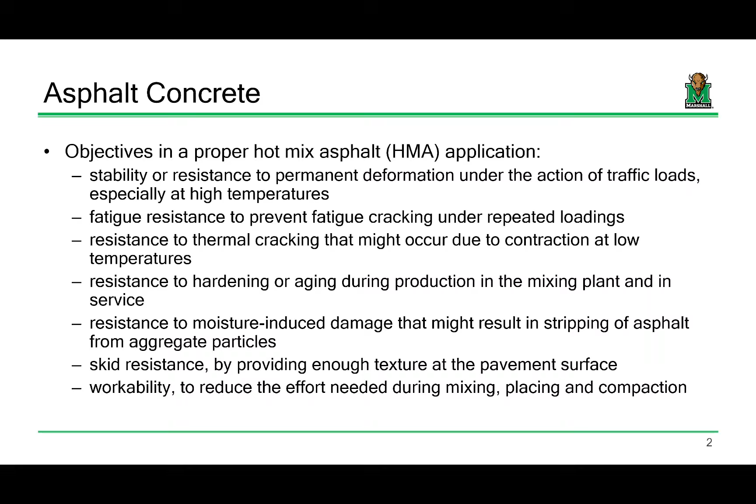Ultimately, when you do a mix design for asphalt, you've got an aggregate—usually not just one aggregate, but a mixture of several to get the proper blend. The purpose is to determine the amount of asphalt that goes into that mix.

It's a little tricky, because if you get too much asphalt binder, you get less stability, since the binding agent can act like a lubricant as you're placing it—almost too slippery. But if you have too little, it's not as durable. So there's a nice little sweet spot.

Typically, your asphalt content in a given concrete is going to be somewhere between 4% and 7%. That's a pretty good set-your-watch-by range. And you'll be placing it at high temperatures, somewhere between 185 and 325 degrees Fahrenheit. Has anybody been on a DOH job where they're placing asphalt? It's pretty hot, isn't it? Yeah, that's what you're doing.

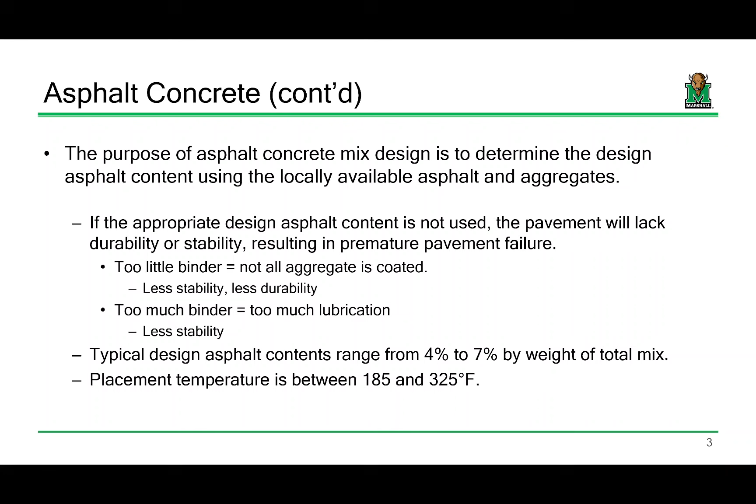Now I'll mention this now since it's a good place for it, and I'll talk about it throughout the lecture. The two ingredients we're essentially proportioning together when we generate an asphalt pavement are asphalt and aggregate. But there is a third ingredient inside the mix, and that third ingredient is air.

A lot of the properties we'll be computing today, whenever you go through a mix design—whether it's the Marshall method or the Superpave method—are very rote, tabular, step-by-step, similar to what we've done all semester: computing specific gravities, weights and volumes, and so on. But there are some ratios that take a bit more time, like the percent air voids in the mix, or the percent voids in the aggregate filled with asphalt. That takes some work to go through, but once you understand it, following the methods is really simple.

Now there are three methods that I just want to make sure you're aware of.

The most common method used today by most DOHs is called the superpave method. There are a couple historical methods I'll mention so you're aware of what's going on: the Marshall method and the Hveem method. We don't really use the Hveem method around here, and I'll talk about why in a bit. The Marshall method is a little more empirical and simpler, but because it's empirical, there's more variance in performance. Superpave is much more rigorous and performance-based.

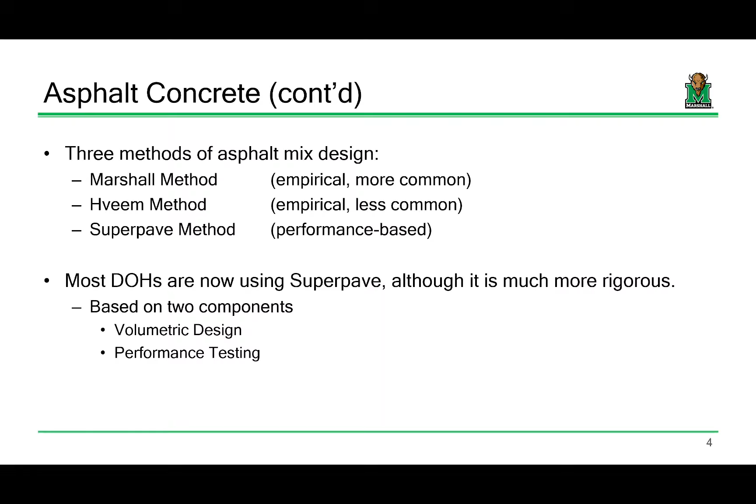One thing about asphalt design methods in general: whenever you review them, like in the case of superpave, you go through selecting the aggregate, selecting the binder, determining the aggregate structure and binder structure. A lot of this requires lab testing. One disadvantage of the superpave method is that you have to do much more extensive lab tests to characterize your aggregate, asphalt, and mixtures appropriately, which can be a money sink in whatever lab setting is doing that.

Do you get better data and a more reliable design? Well, yes. All of these mix design methods ultimately rely on some sort of testing, and that's not really anything hyper unique to asphalt.

Think about the mix design we did for concrete. We went through this big volumetric design process, about 11 steps to get to the answer, but that was just the first part. The second part was to go to the lab, test those cylinders, and adjust your mix accordingly, iterating as needed. It's the same idea here.

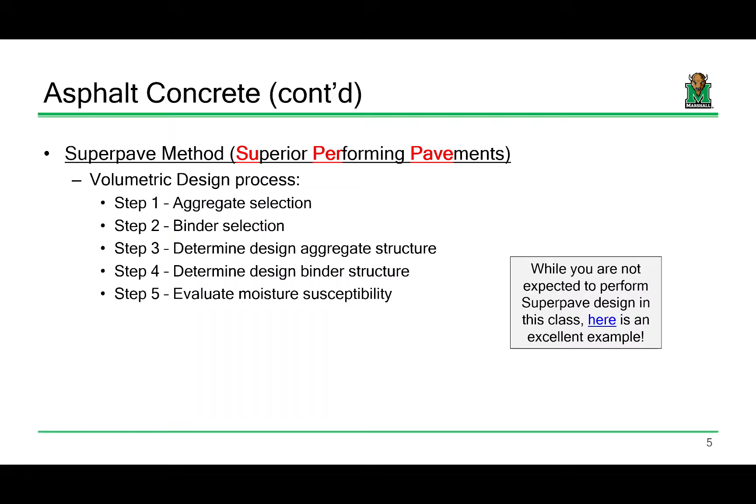Now, one thing I'll mention—I linked this. It's from Rowan University, a really good PowerPoint that goes step by step through how to do superpave if you're interested. It's pretty easy to follow and it all works very well. What I'm going to try to do today is fill in the gaps on some of that stuff.

The Marshall method is a simpler approach, but it also requires lab tests and whatnot. The thing about asphalt design methods in general, and the Marshall method is a good way of illustrating this, is that these methods are very repetitive. You end up having to do the same computations over and over again, so they're very spreadsheet friendly.

So what happens is, in the case of the Marshall design method, you've got to do all of your aggregate evaluations—things like specific gravity, angularity, all of that. You do the same characteristic assessment of your asphalt binders. Then you need to perform a void analysis, which is what we're going to be doing today. Once you do that, ultimately it's a lot of repetitive calculations.

You generate a series of graphs by assuming an asphalt content of, say, 3.5%, computing a bunch of void ratios—the VFA, the VMA, the air voids, etc. Then you do it again for 4%, 4.5%, 5%, and so on. So it's very spreadsheetable, if that makes any sense.

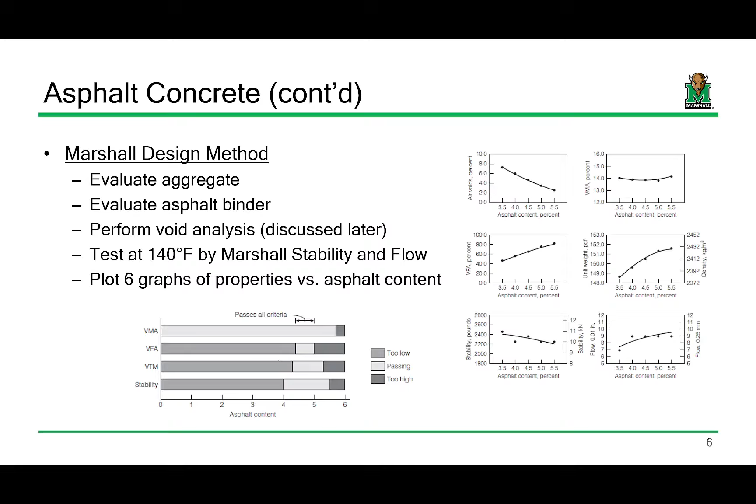You get a series of curves for each of these different ratios, and ultimately, talking about voids filled with asphalt, depending on the asphalt content you choose, there's a range that's too low, a range that's too high, and a range that works. For each of these ratios under a given mix design method, you try to find the range where they all work, and that range satisfies all of your criteria—so you pick your asphalt content there. Once you understand how to compute these, it's a pretty straightforward process.

I mentioned the Hveem method just to be comprehensive, but we didn't really use it. The Hveem method is very empirical, and the only place you really see it used is in the western part of the United States. It's a lot simpler, but there's a little less correction for aggregate properties and things like that—the method assumes some base behavior that you'd get if doing the mix design in a given location.

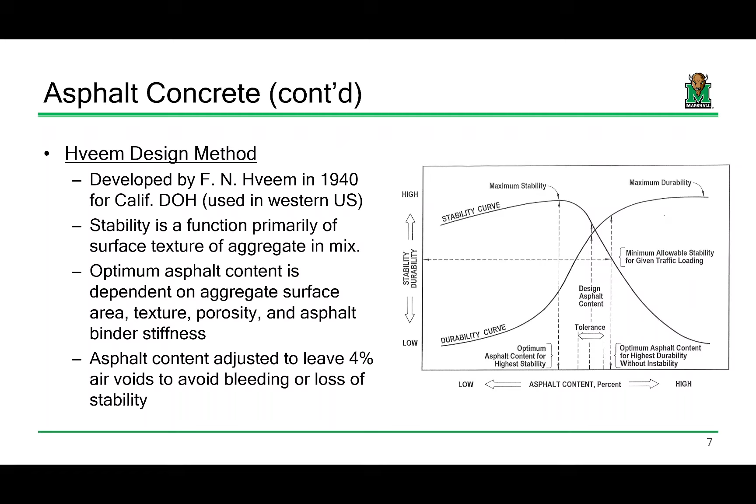So that's why, I'm not saying there's anything wrong with it, I'm just saying that sometimes in engineering you will find methods that work very well within their chosen constraints. And when you take those methods and start applying them out of that context, that's when you start getting some problems.

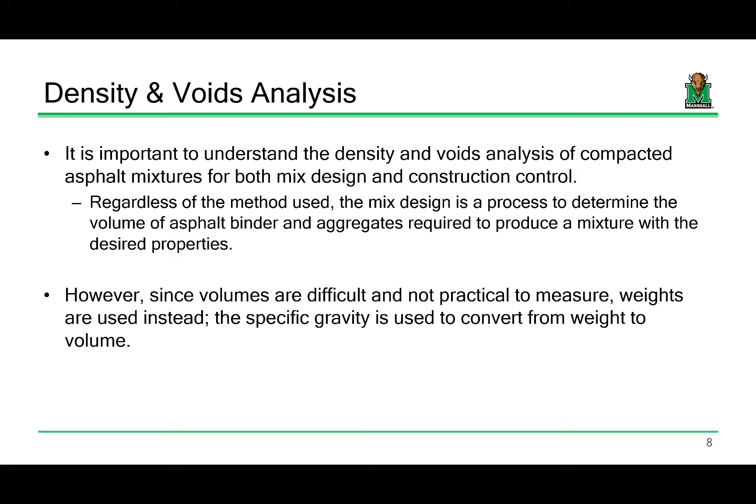Volumes are really difficult to measure, okay? Weights are a lot easier to measure. So what we're going to do, since we know how to characterize each individual component, is define these volumetric void ratios rigorously as volume ratios. But since volumes are difficult to measure, we're going to convert them to computations using specific gravities. There's a little bit of magic I'm doing in the background for that, but you'll get what I'm talking about in a bit.

For those of you that have not had geotech, I'm going to draw a soil phase diagram over here on the board and relate it to this. So if you're looking at a sample of soil, let's say I dig up some soil from the earth and ask, what are its constitutive components? Well, in the case of soil, it's composed of 3 individual constitutive components at different percentages: air, water, and solids.

And then for a given soil sample, a very common exercise in geotech is: if I give you certain data points, can you compute everything else? So the way I always did it is, over here on the left, I would characterize weights, and over here on the right, I would characterize volumes. Is that how you all did it? Yeah, does that look familiar? So it's almost like drawing dimensions. For the weights, we'll call this dimension the weight, sometimes called weight total. And the same thing over here, we'll have a volume total.

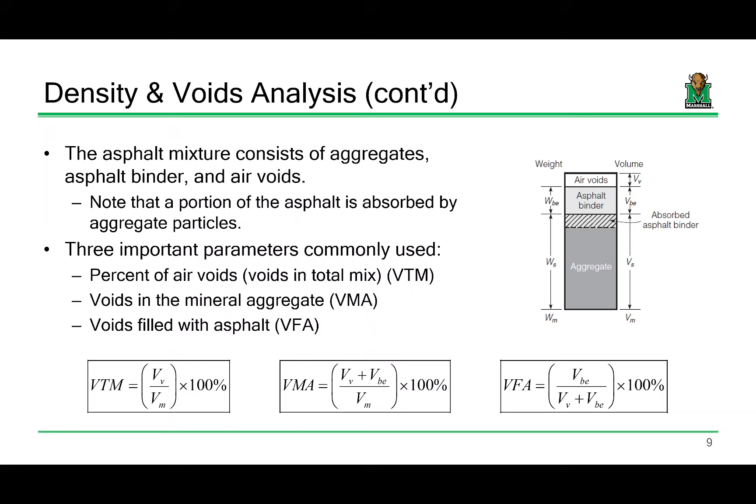The problem is that computing these volumes for an asphalt is very complicated because asphalt is compacted. So if I take a section of asphalt that has this volume, I can compact it, and it has a different volume. So computing these ratios in terms of volumes is a little tricky. Instead, what's a little bit more accurate is to express them in terms of weights, or maybe more indirectly, in terms of specific gravities.

I'm going to throw some terms at you. Some of these terms you've kind of seen, some of them you haven't. We're going to see these here in a bit. So the first thing I'm going to show you is this GMM.

GMM stands for, it's basically the maximum possible specific gravity of the asphalt concrete mixture. So when I say asphalt concrete, I mean binder, aggregate, all of that. GMM is the theoretical maximum specific gravity, sometimes called the Rice gravity. So if you ever hear the term Rice gravity, that means the theoretical maximum specific gravity -- in other words, what would happen if there was binding agent, aggregate, and no air. That is as heavy as it could get.

GSE, which we're actually not going to explicitly use here, but that's the specific gravity of the aggregate, and then GB, that's going to be the specific gravity of the binder.

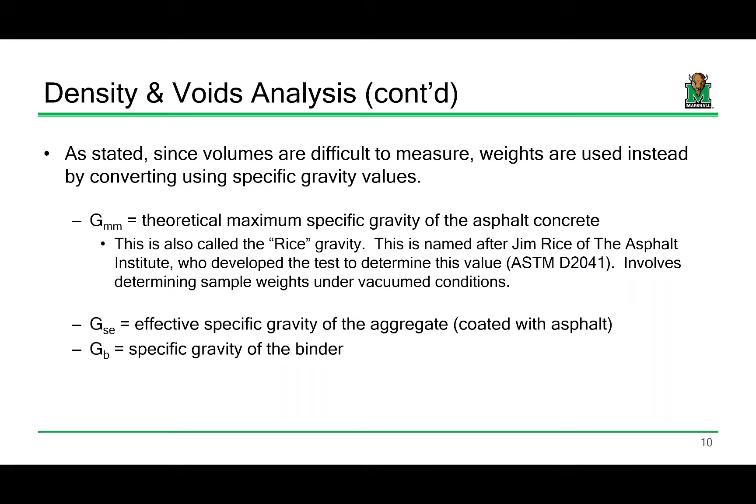Now, I'm bringing up some stuff here that we've seen a while back. Do you remember, this was way back in the semester, when we were talking about blending aggregates? Remember how we would say, here's gravel 1 and gravel 2, and neither gravel 1 nor gravel 2 meet the specifications for a given job. But if I put a little bit of gravel 1 and a little bit of gravel 2 all together, suddenly I've got an aggregate that works. Y'all remember that? And remember how all of the properties were computed as a weighted average, other than the specific gravity.

And remember how we compute the specific gravity -- we take 1 divided by the sum of the percentage of a given component divided by specific gravity. Y'all remember that? We're going to do that today. Now, I'm going to slightly adjust it a little bit.

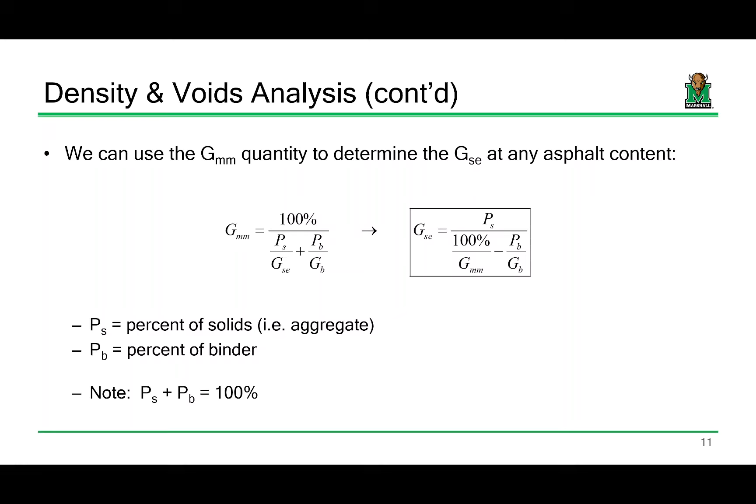I'm going to call this 100% because I'm going to express these as percentages. So the top's going to be multiplied by 100, the bottom's going to be multiplied by 100. We're going to see that here in a little bit.

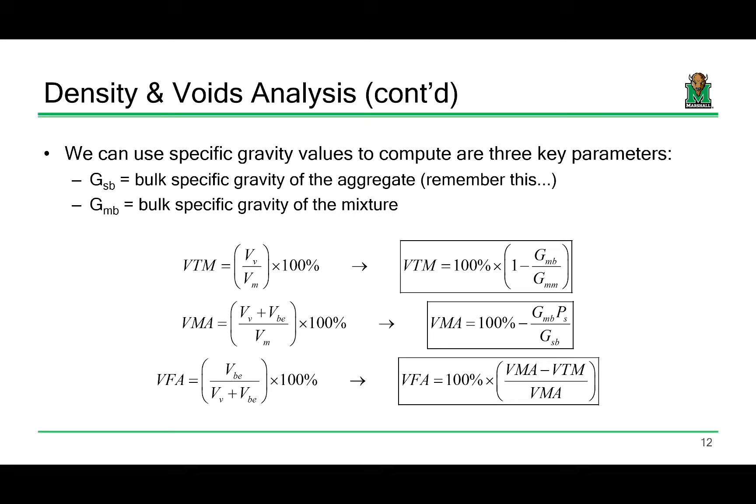For each of these ratios, instead of computing with volumes, I'm going to compute them with specific gravities. There's a couple terms we're going to go through together: the bulk specific gravity of the aggregate, the maximum theoretical or Rice specific gravity, and we're also going to need to calculate the bulk specific gravity of the mixture. It's not hard, but there's a little bit of bookkeeping involved.

So let's explain that bookkeeping with an example. I have a compacted specimen of hot mix asphalt. Let me set the stage on what's going on here. I prepared a mixture of hot mix asphalt with 4 aggregates and a binding agent: aggregate 1, aggregate 2, aggregate 3, aggregate 4.

If you notice here on the board, this is data that I was looking forward into the future, so I went ahead and wrote it here. The total weight, if I sum this up, is something like 5.51 pounds.

From this mixture of asphalt, I drew a sample of about half of it and compacted it into a test specimen. I drew from this sample a specimen that weighs 2.55 pounds and has a volume of 30.5 cubic inches. We're going to use that a little bit later.

What I want to determine, ultimately, is these volumetric ratios. But in order to determine these volumetric ratios, I'm going to need to determine these specific gravities. So let's go through this.

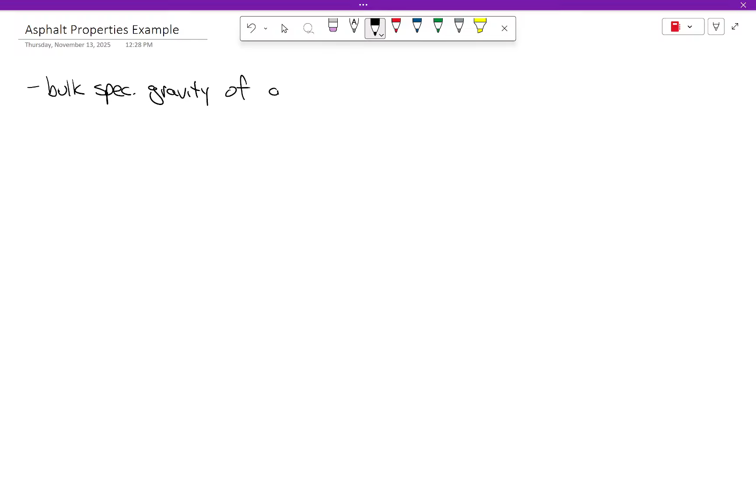There's several properties that we need to compute, so I'm going to take each property one step at a time. The first property that we're going to compute is the bulk specific gravity of the aggregate.

The symbol for that is GSB. This is before we're taking this aggregate mixture and putting it into the mix. We're just taking all these 4 aggregates and trying to treat them as one. So this value - we've got 4 aggregates, I just want to treat it as one aggregate. I need a specific gravity of the mix.

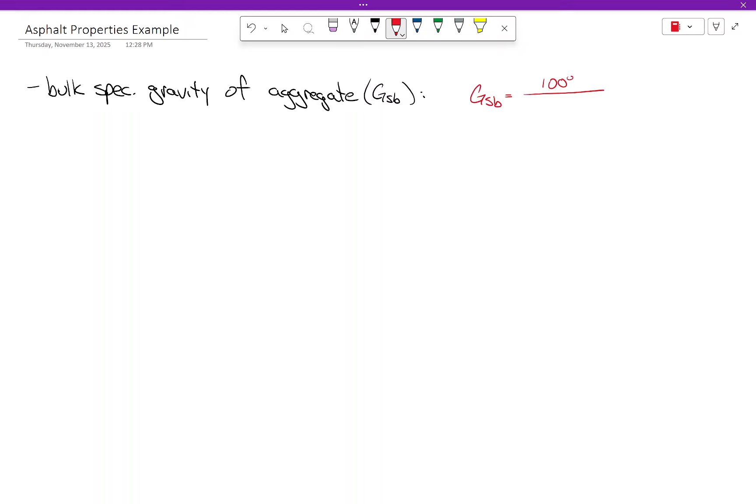And the way that we're going to compute that is a fraction. We're going to take 100% divided by the sum of Pi over Gi. This is going to be how we do that. So how do we go about that? We have our components.

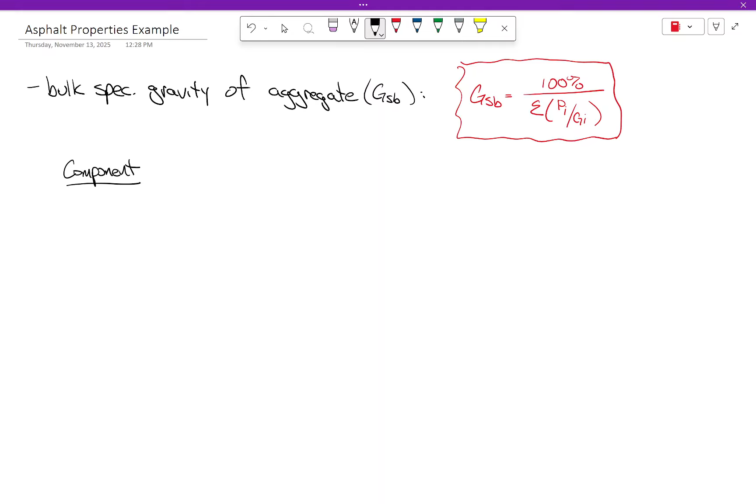Oh sorry, wait, I'm getting ahead of myself. I'm looking at the aggregate right now, so I'm actually just going to list the aggregates by themselves. I'm going to do the binder later.

So the weight of these is going to be 1.76, 2.43, 0.77, 0.33. I'm skipping the binder right now because I'm just trying to characterize the bulk specific gravity of the aggregate. If I sum these up, I get 5.29. That's different than the other total because that one includes the binding agent - I'm not looking at the binder right now.

Now the next thing I want to compute is a percentage. So let's pop quiz everybody: the total amount of aggregate in this mixture is 5.29 pounds, and aggregate 1 takes up 1.76 pounds. How much is the percentage? How would I calculate this - is it 20%? Is it 30%? How much is this part of the mix?

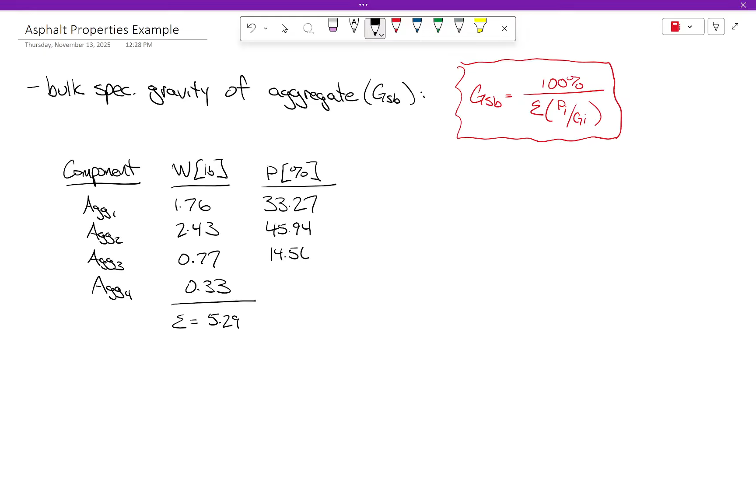33.27%, and you basically just took that and divided it by the sum. I'm multiplying it by 100 just to make the numbers a little bigger and easier to deal with. Is everybody okay with that? And if I kept going, this is going to be 45.94, 14.56, 6.24. Let's just have those there. If I sum those up, that should be 100. There we go.

So now I'm going to list the specific gravities. I've got something on my screen there.

So the specific gravities are 2.62, 2.51, 2.47, 2.42. Okay, so now that I've got that, what am I going to do with it?

Ultimately, I need to take 100 and divide it by this sum. That sum is going to be the sum of these fractions. So let's calculate that fraction for each row.

Let's take Pi divided by Gi. What am I doing? I'm taking this divided by that, this divided by that, this divided by that, this divided by that. So that's going to give me...

12.699. Is everybody okay with that? This is going to be 18.301. 5.893, 2.578.

Is that okay that I just did that, or y'all comfortable with that? It's just the percentage divided by the specific gravity. Yeah, just that, bam bam bam bam bam. This one's 6 and change divided by 2 and change is about 2 and change.

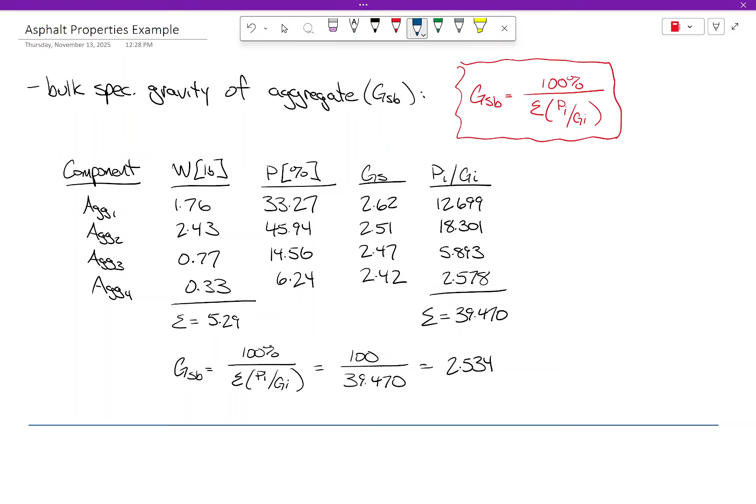So let's just put that on the board, just so we have it. Okay, all right. Is that easy? Everybody okay with that? All right, so that one's easy. Okay, what about the next one?

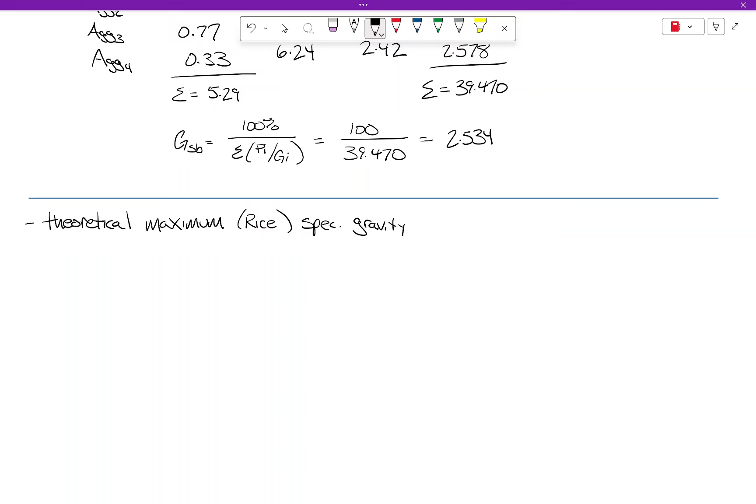So the next thing we're now going to compute is theoretical maximum, or the Rice specific gravity, okay?

Now this is going to feel really redundant, but that computation I just did, I'm going to do it again. What's going to change? Instead of looking at aggregate 1, 2, 3, and 4, now I'm going to look at aggregate 1, 2, 3, and 4 and the binding agent. So essentially I got to do this calculation all over again. Now you might think, what changes? Well, just bear with me.

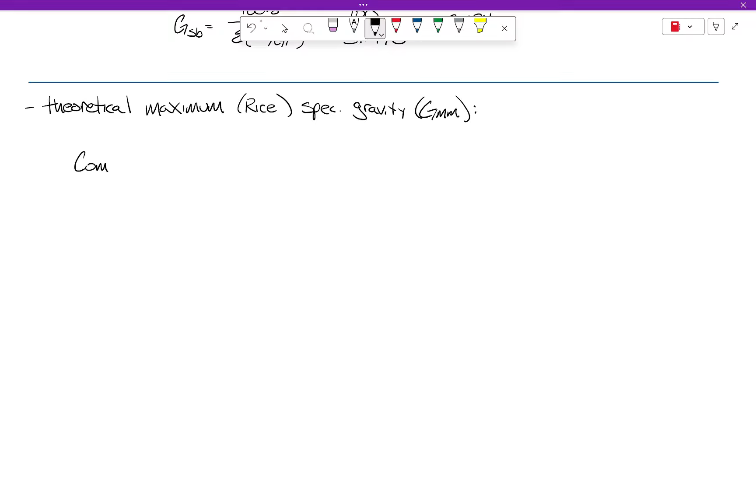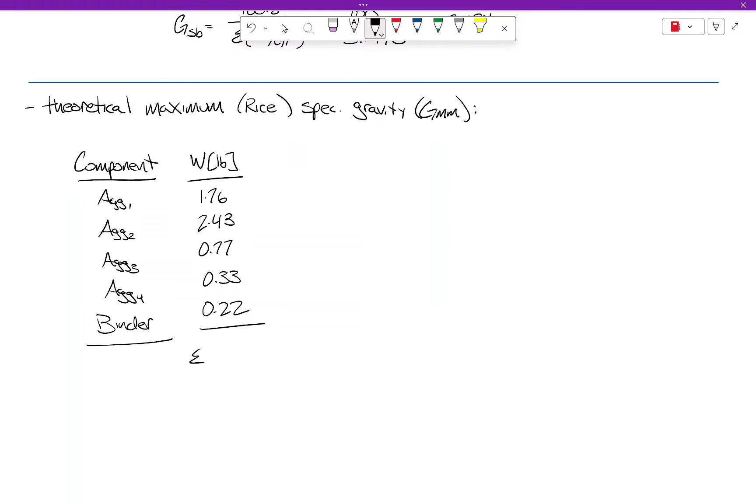Okay, so let's record our weights down. Now here's the thing: the sum at the bottom is now different. Before, the sum was 5.29. Now the sum is going to be 5.51.

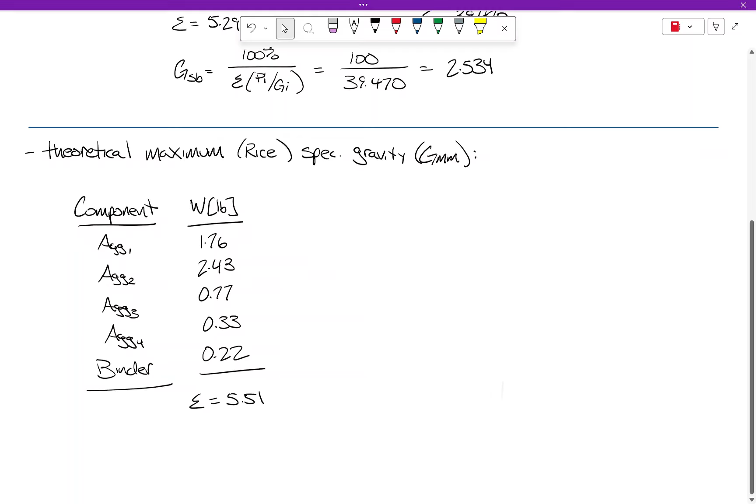So what I'm getting at is, because I now have a new ingredient, each one of these percentages are going to be ever so slightly different. And I've got another ingredient, so basically I have to do that specific gravity calculation all over again, just with a new ingredient.

Take 1.76 divided by 5.51. Take 2.43 divided by 5.51, etc. All right, and then we've got our specific gravity.

And so now I'm going to do the same calculation. Yeah, it's kind of a dry set of computations.

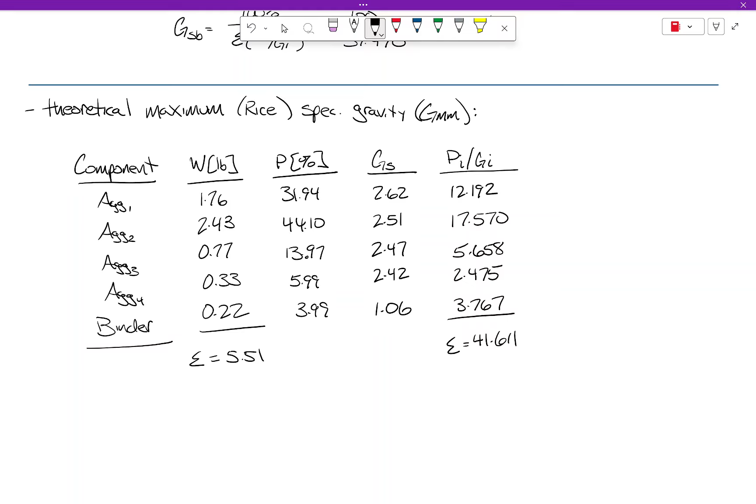Now, I'm going to leave a little bit of space right here for a reason. Just bear with me on that, okay? All right, so how do we calculate our GMM?

And it ends up being 2.400.

So let's just take a look at the data. This is the specific gravity of the aggregate. This is the maximum possible specific gravity of the asphalt concrete mixture. Now, why is it less? Well, it's because we added a binding agent that's not very heavy, so that's going to drop the overall specific gravity. But this specific gravity assumes no voids in the mixture.

And so when we calculate GMB, which is the specific gravity of the sample that we collected, it's going to be less than 2.400 because it's got air in it, okay? So you're going to see that here in a bit. But I'm not done with this. We're going to see a value pop up in a later calculation.

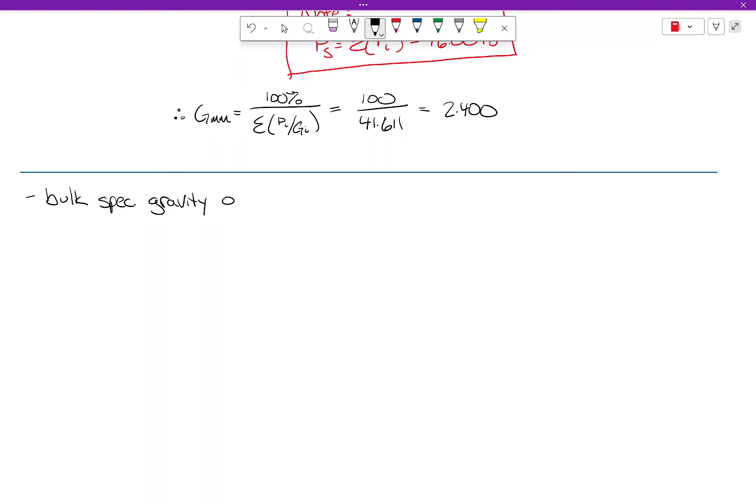Okay, next thing I'm going to compute is this.

Just to explain what we're doing here, remember ultimately all of these voids are trying to make sure we're fully characterizing the air in the mix. This GMM value is what the specific gravity of the asphalt mixture would be if there was no air in it. But we drew a sample, and that sample has air in it.

So how are we going to figure that out? Well, what do we know about the sample that we drew? We know the sample has a weight of 2.55 pounds, and we know the sample has a volume of 30.5 cubic inches. Now, how do we measure unit weights?

How have we been measuring unit weights? The unit weight of water is 62.4 what? I know you all have fluids, I hear about it all the time. Unit weight of water is 62.4 pounds per what? Come on, don't be shy. Cubic inch? Pounds per cubic inch? Cubic feet. Come on now.

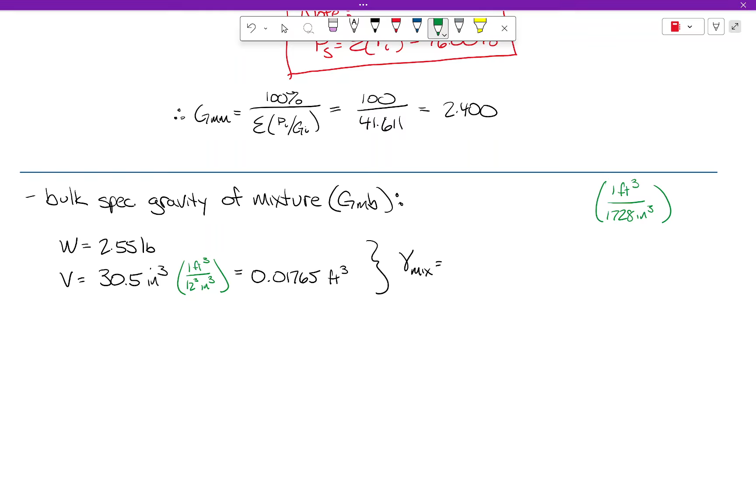Now, how do we compute unit weight? Weight over the volume. Weight over the volume. There we go.

You didn't really want me to bring up fluids again, did you? Come on now. Y'all are done with this semester, I can tell. Y'all are just done. We're almost there. Look at this, after today in this class we only have 3 more lectures, and one of them is just Q&A on the lab report. So we're almost there. Can you say that louder, Cole? I think he's expressing joy. This class is not the problem, is what he said.

The answer is 144.472, and the units are pounds per cubic feet.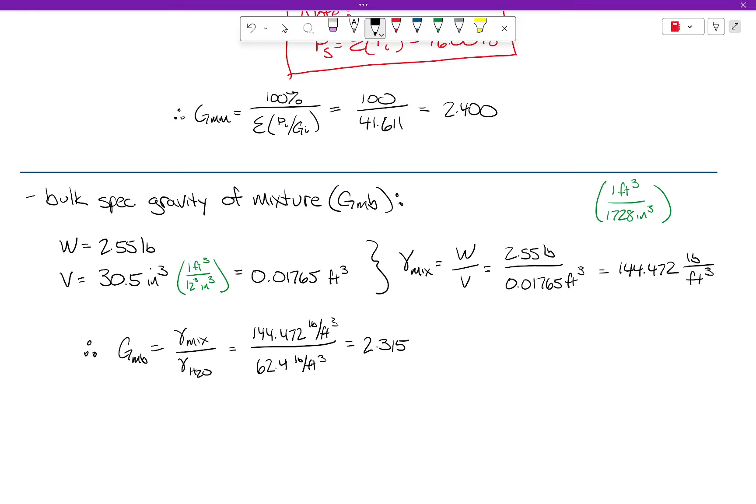So these are our three specific gravities, and we're going to use these specific gravities in order to compute our three ratios. Once you get these specific gravities, our three void ratios are pretty simple to compute. They're not hard, okay?

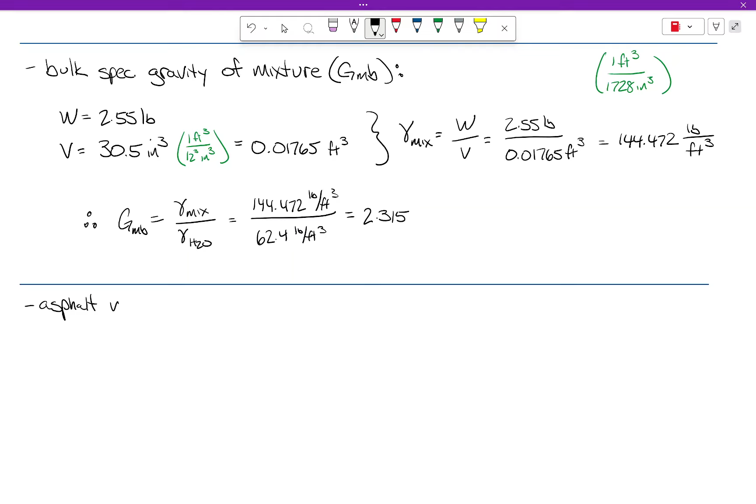Okay, everybody got this? Metric and US units, all right.

Okay, first thing we're going to compute is the percent air voids in the total mix, which is called the VTM.

And the VTM, so here, let's see if we can reason through what the formula looks like. Okay, so first off, I'm going to want this as a percentage, so I'm going to multiply it by 100% on the outside. So this is the specific gravity of the mixture, and this is the maximum possible specific gravity.

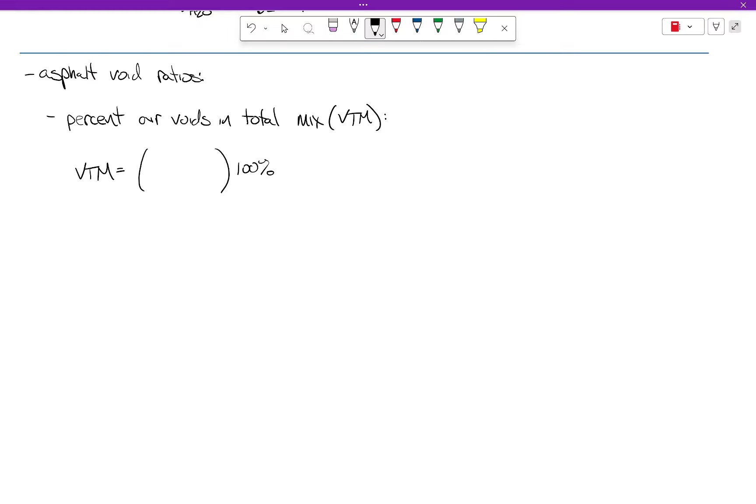So the difference between the two is the fact that there are voids in it, right? And we're talking about a percent change. So essentially what I'm doing is the change in specific gravity over the original. It's like a percent change in an experiment.

So one way that we could compute that is we could say GMM minus GMB over GMM, right? Theoretical minus expected, all over. But we can separate that as 1 minus GMB over GMM by just recognizing that GMM over GMM is 1.

And what is the formula? The formula is 1 minus GMB over GMM. That's it. So it's a pretty straightforward calculation.

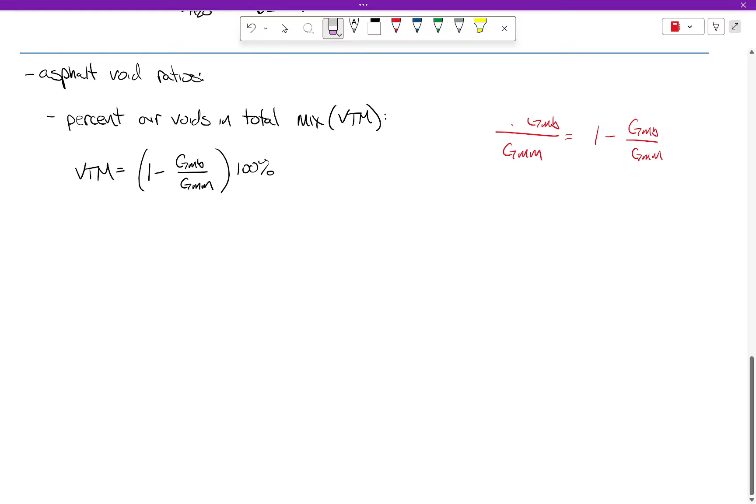And the way that we compute that is as follows. Okay, so when we chug that out, we get 3.54%.

So what that's saying is that 3.54% of the volume is air.

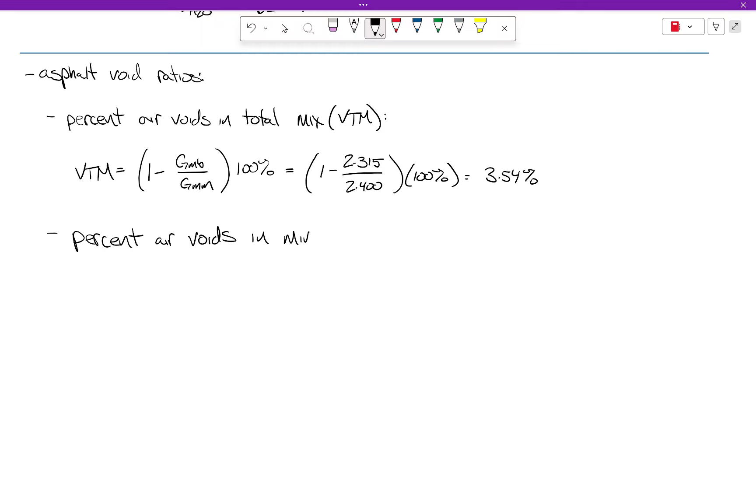All right, so for this next one, the next ones are percent air voids in mineral aggregate. Okay, I know, I'm a dork.

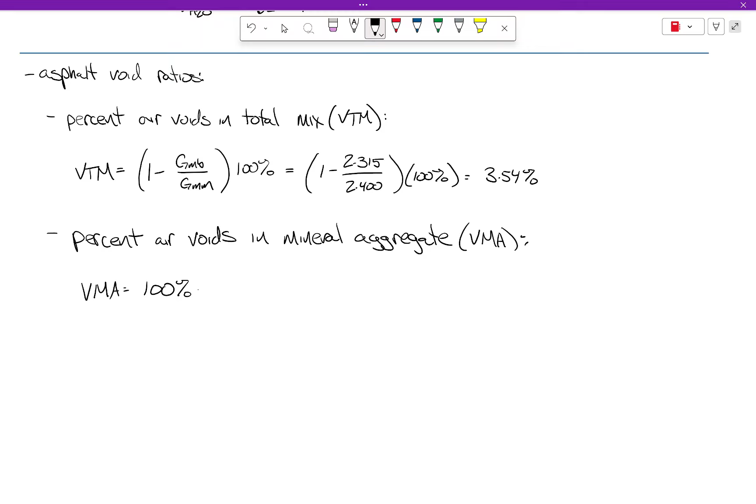Now the way that we compute that is we basically say, okay, let's start off with 100% of the volume, and let's subtract out a fraction. Okay, what is that fraction?

Okay, well on the denominator is GSB, in other words, the total amount of just aggregate specific gravity. And on the top, what we're going to do is we're going to take our mixed specific gravity, but we're not going to take all of it.

All we're interested in is how much of that is occupied by solids, how much of that is occupied by aggregates. Okay, so it's essentially, again, it's a 1 minus, okay, with the percent, the 100% factored in.

So it's sort of in the same fashion as this. The only difference is I'm adjusting this by, all I care about is how much of that is solid. Okay, so it's 100% minus a fraction,

2.534 on the bottom. And of that, I want to know how much of the asphalt mix is solid. So when we chug that out, we get

12.30%. So our VMA is 12.30%.

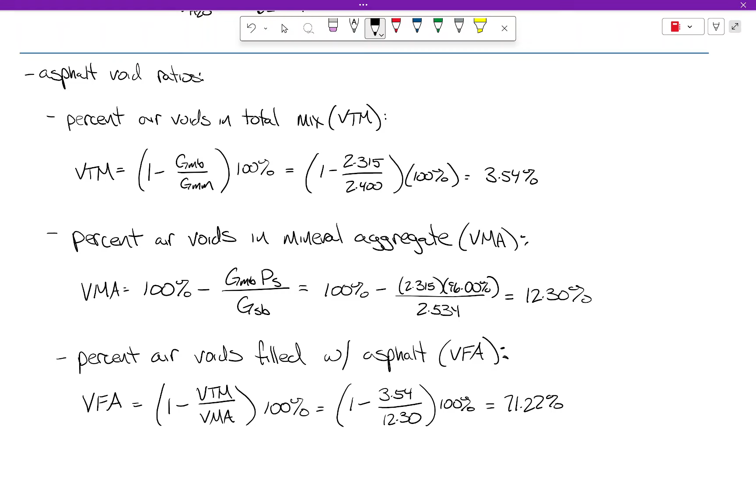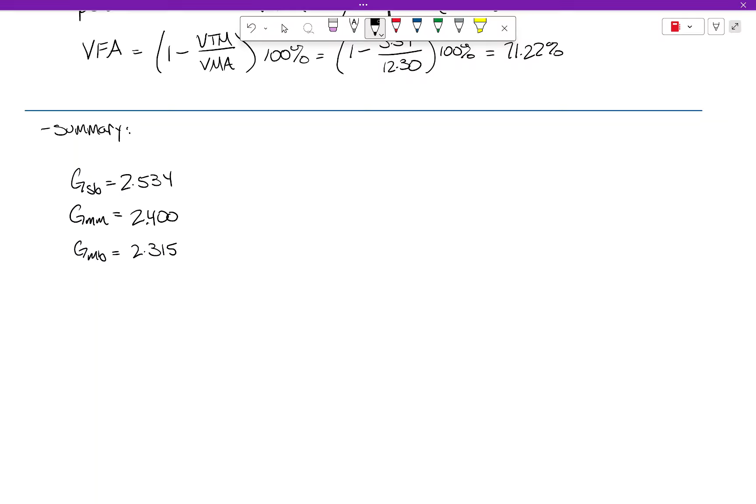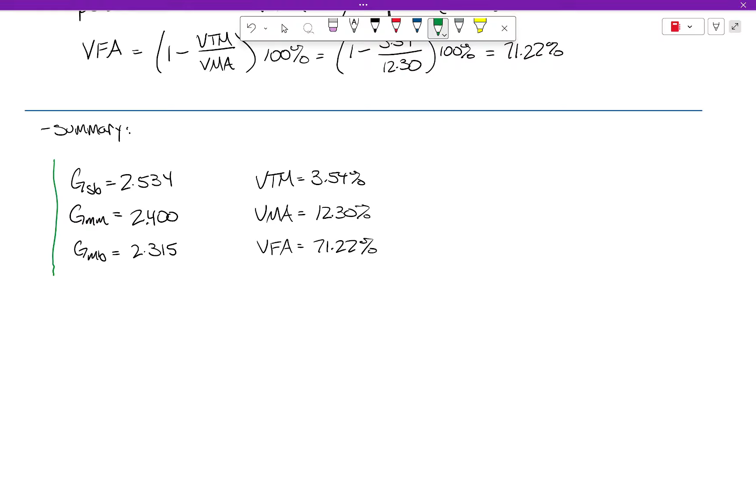So now I'm just going to write down all the values.

Is that too bad? I'm hoping that's really easy. I'm hoping that's not very, very challenging.

And again, if you start going through mix design procedures for asphalt, like I said, we didn't cover them, but I think it's worth it to peruse the textbook, take a look at them, and what you're going to see is a lot of really familiar calculations mixed with these, okay? And so once you know how to do these, it's really not that hard.

I mean, I think part of being an engineer is learning how to do stuff you've never done before. I want to provide you the tools necessary to figure that out, but we're not going to teach you everything. So once you understand this, I think you can work through it.